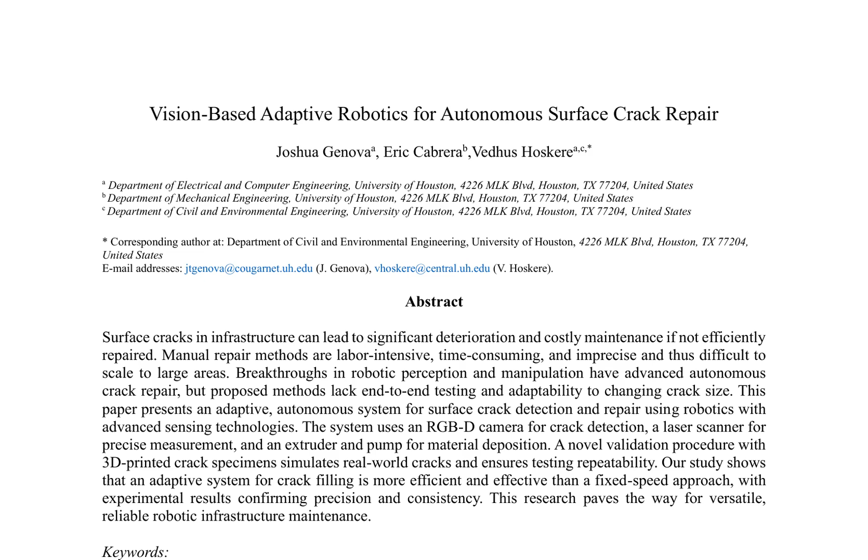for material deposition. A novel validation procedure employing 3D printed crack specimens ensures testing repeatability and simulates real-world cracks. The study demonstrates that an adaptive system for crack filling is more efficient and effective than a fixed-speed approach, with

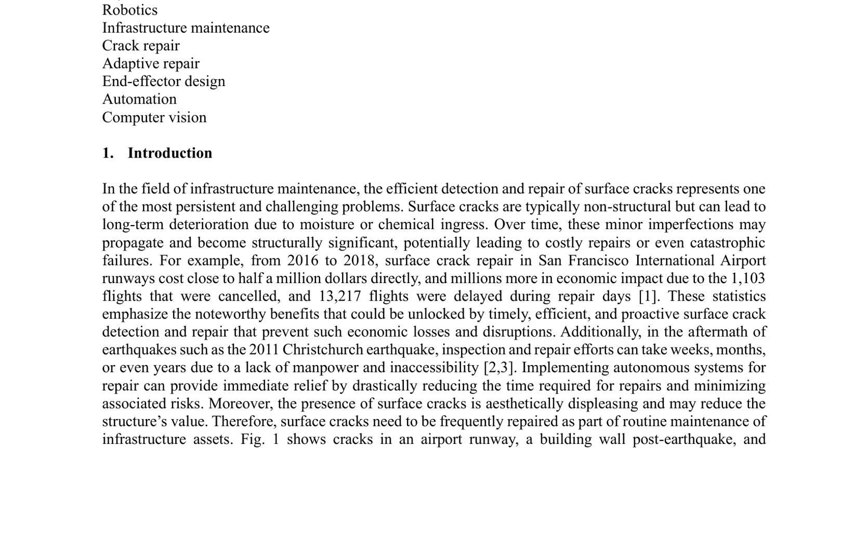experimental results confirming precision and consistency. This research has the potential to revolutionize infrastructure maintenance by providing a versatile, reliable robotic solution.

The research paper explores the challenges and limitations of traditional methods for repairing surface cracks in various environments, such as airport runways, building walls, and doors. These manual processes are time-consuming, prone to human error, and often result in inconsistent repair quality and safety risks.

The integration of adaptive automation and robotics offers a promising approach to enhance accuracy, efficiency, and safety in surface crack repair, improving the longevity and reliability of infrastructure assets and reducing disruptions.

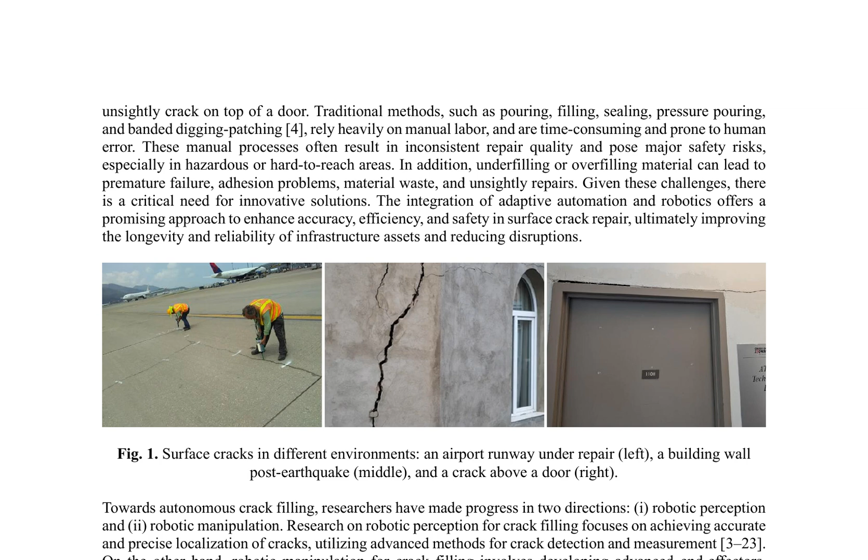In terms of robotic perception for crack filling, significant strides have been made in achieving accurate and precise localization of cracks. Researchers have developed advanced methods for crack detection and measurement using deep learning, unmanned aerial vehicles (UAVs), data acquisition, and visualization for decision-making. These advancements address challenges in data extraction, accuracy, and inspection efficiency.

For robotic manipulation, researchers have focused on developing advanced end effectors, control methods, and path planning to enable precise and efficient application of repair materials to identified cracks.

Several studies have contributed to the development of more effective and autonomous crack repair systems, including semi-autonomous vision-guided systems and robotic manipulators designed for efficient and precise crack filling.

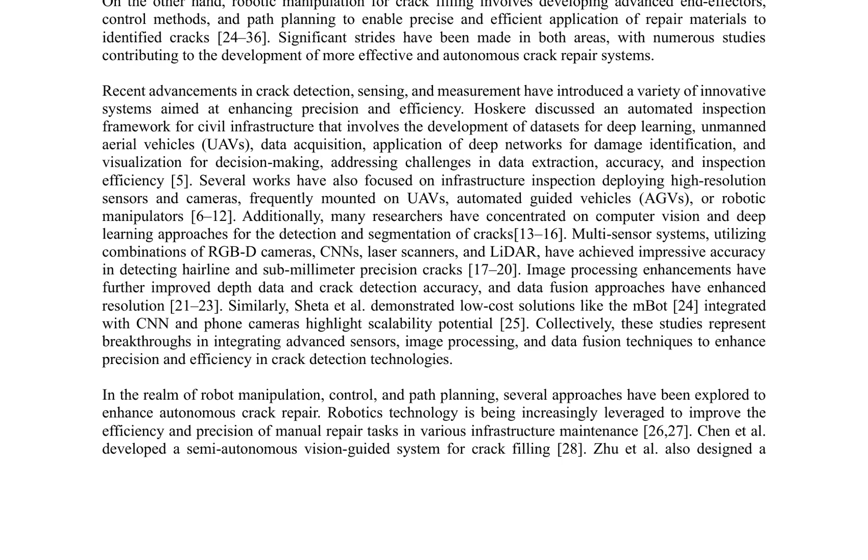Overall, the paper highlights the importance of integrating robotics and automation in crack repair to overcome the limitations of traditional methods. It emphasizes the progress made in both robotic perception and manipulation, showcasing innovative solutions that could revolutionize the field

of surface crack repair. Recent advancements in robotic crack repair have shown promise in adapting to various crack conditions. Notable progress has been made in tracking control accuracy using visual data and path planning for detection robots.

UAV-based systems with soft continuum arms and 3D asphalt printing capabilities have expanded accessibility and on-site repair possibilities. Advanced end effector designs integrating multiple sensors for sealant width monitoring and computational models for predicting sealant flow offer faster

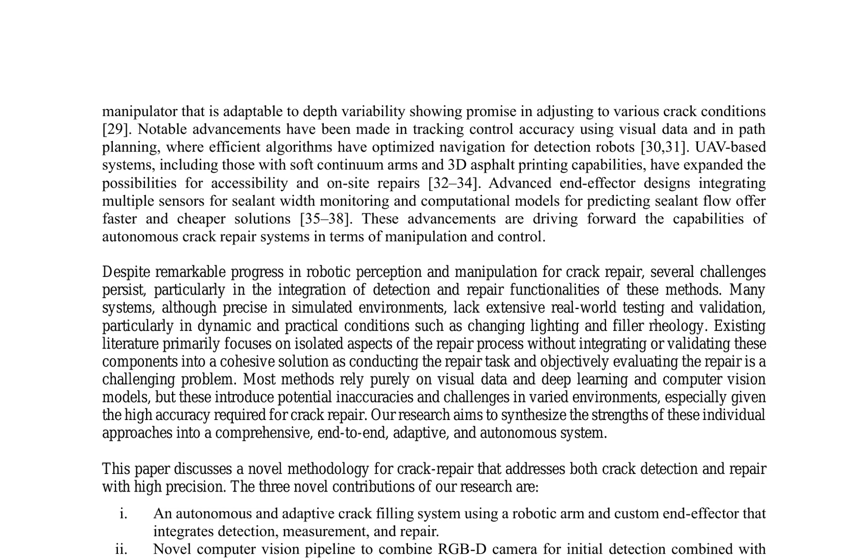and cheaper solutions. Despite these advancements, several challenges persist, particularly in integrating detection and repair functionalities, and most methods rely on visual data and deep learning models, which can introduce inaccuracies in varied environments.

This research aims to synthesize individual approaches into a comprehensive, end-to-end, adaptive, and autonomous system for crack repair. The proposed methodology consists of 4 parts: extrusion calibration, crack coordinates extraction, crack profile measurement, and crack filling.

The calibration process determines extrusion rates by printing material at various speeds and measuring the output. Crack coordinates are extracted using an image segmentation model, and then refined with a laser scanner to enhance precision and

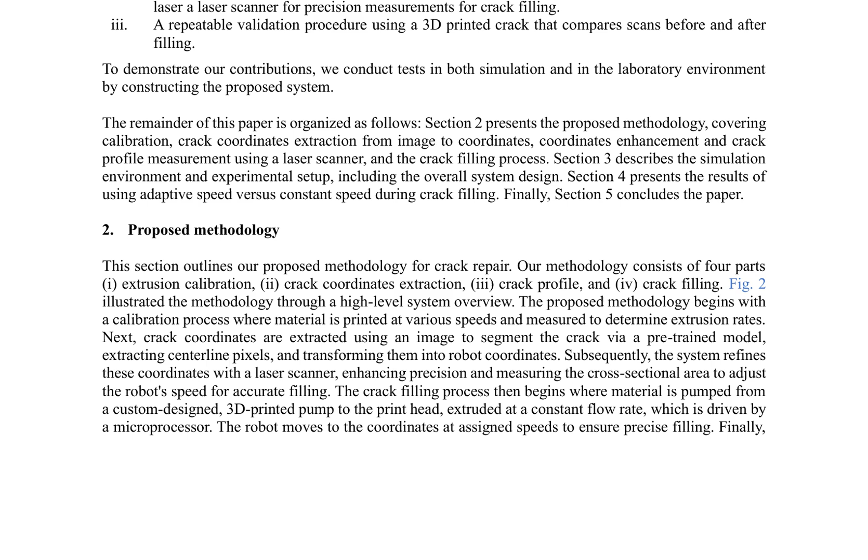measure the cross-sectional area. The crack filling process involves pumping material at a constant flow rate, driven by a microprocessor, and moving the robot to the coordinates at assigned speeds to ensure precise filling.

The proposed validation methodology for crack repair in 3D printing begins with a rescan of post-fill profiles, utilizing heuristic algorithms to detect cross-sectional area. This process is crucial in ensuring that the crack is properly repaired.

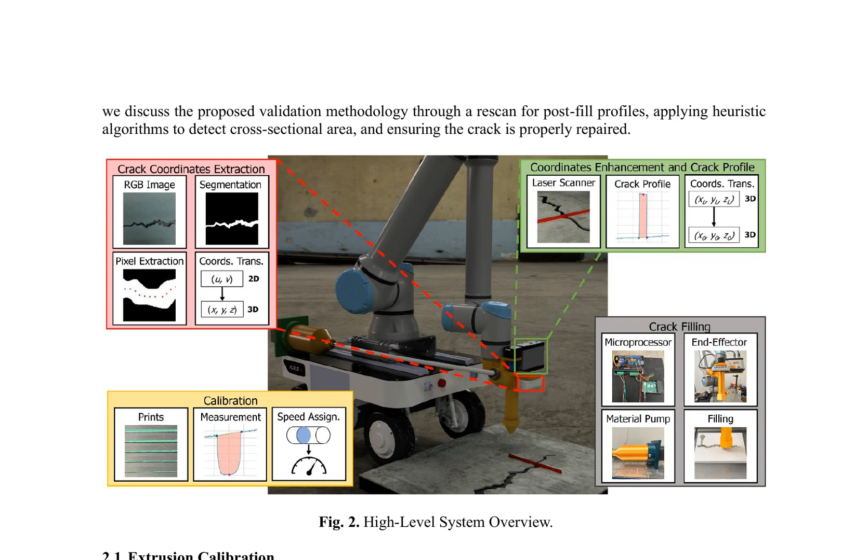Calibration plays a pivotal role in achieving accurate material extrusion during the repair process. It involves printing a strip of material at different speeds and measuring the cross-sectional area using a laser scanner.

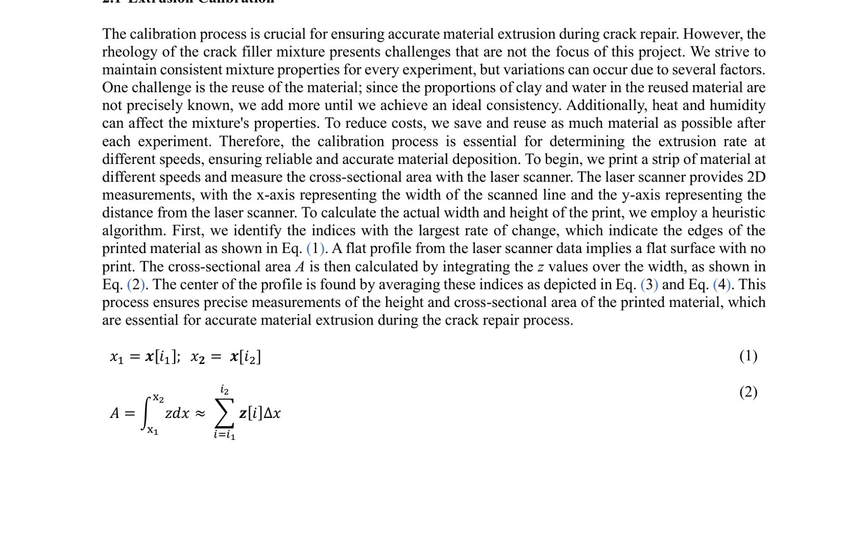The laser scanner provides 2D measurements, which are then processed using heuristic algorithms to calculate the actual width and height of the print. This process ensures precise measurements of the height and cross-sectional area of the printed material, essential for

accurate material extrusion. The authors introduce the concept of calculating the center position of a crack in the X and Y axes, denoted as Cx and Cy, respectively.

This is achieved by averaging the indices I1 and I2, which correspond to the points with the largest sudden change in laser depth Z. The equation for Cx, Cy is given as Cx, Cy equals x_IAVG, z_IAVG, where x_IAVG and z_IAVG are the x and z values from the laser scanner data at the averaged index IAVG.

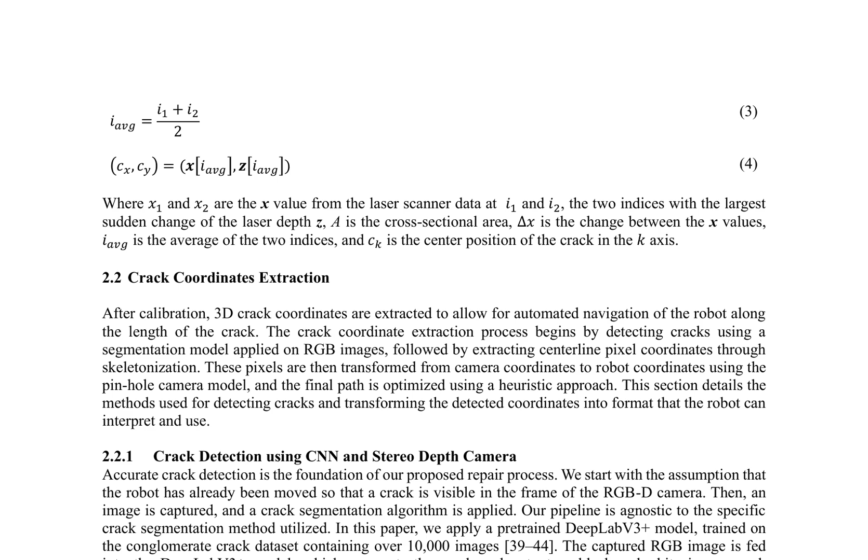The crack coordinate extraction process involves detecting cracks using a segmentation model applied to RGB images, followed by extracting centerline pixel coordinates through skeletonization. These pixels are then transformed from camera coordinates to robot coordinates using the pinhole camera model, and the final path is optimized using a heuristic approach.

The crack detection process is based on the assumption that the robot has already been moved to capture an image of the crack using an RGB-D camera.

The authors utilize a pre-trained DeepLab v3+ model, trained on the conglomerate crack dataset containing over 10,000 images, to segment the crack and output a black and white image mask highlighting the crack.

In the image pixel extraction process, a segmented mask image is converted to grayscale and undergoes binary thresholding to create a clear black and white binary image. Skeletonization is then applied, reducing the crack representation to its thinnest form while preserving the overall structure.

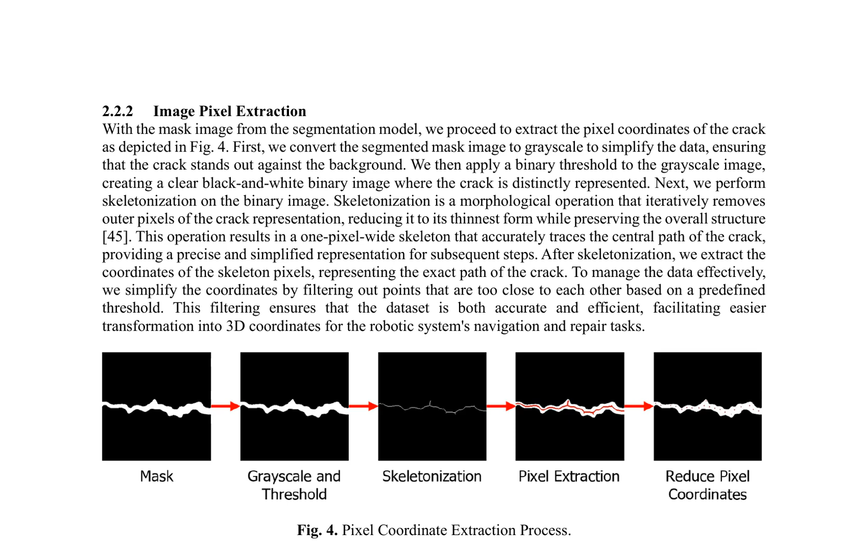The coordinates of the skeleton pixels are extracted, representing the exact path of the crack. To manage the data effectively, points that are too close to each other are filtered out based on a predefined threshold. The pinhole camera model is used to accurately transform the pixel coordinates of detected cracks into 3D camera coordinates.

This model translates the 2D image data captured by the RGB-D camera into a spatial format that the robot can use for precise and effective repair operations.

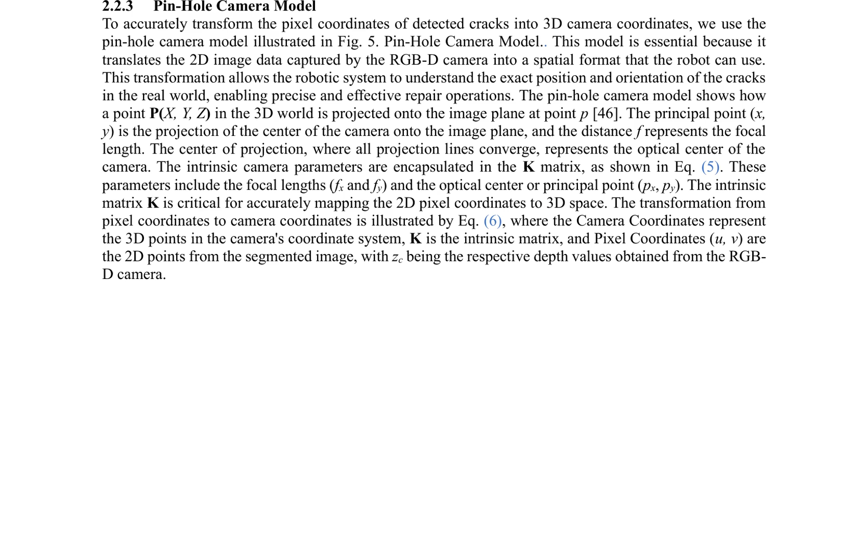The transformation from pixel coordinates to camera coordinates is illustrated by the equation, where the camera coordinates represent the 3D points in the camera's coordinate system, K is the intrinsic matrix, and pixel coordinates U, V are the 2D points from the segmented image, with Zc being the respective depth values obtained from the RGB-D camera.

Accurate transformation from camera coordinates to robot coordinates is vital for the robotic system to interpret and act upon crack spatial positioning. This process involves creating a transformation matrix, T0C, using the camera's extrinsic parameters, including its translation and rotation relative to the robot's base, as defined in equation 7.

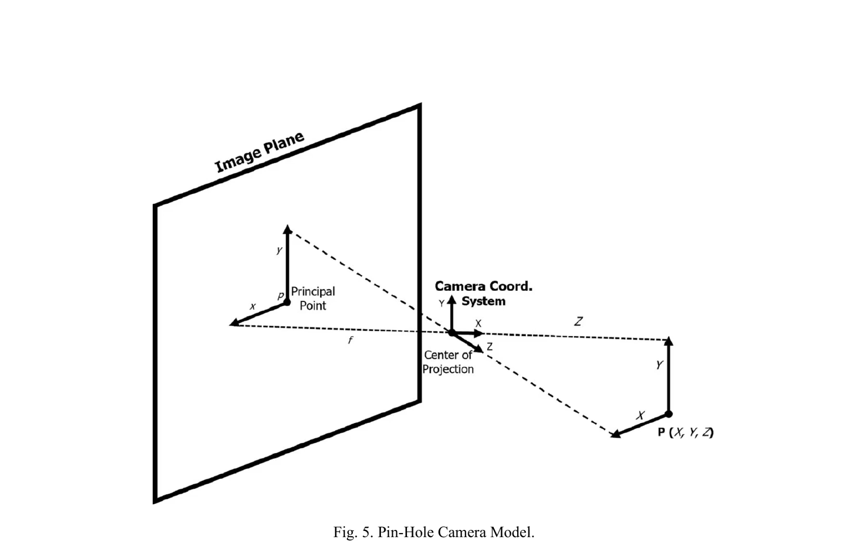The overall process, from pixel coordinates to robot base coordinates, is illustrated in Figure 6. The origin in the image plane, O-image, is where the pixel coordinates of the crack are located.

These coordinates are then transformed to camera coordinates, resulting in a new origin, O-camera. Subsequently, O-camera is transformed into O-robot, the origin of the robot base frame, thereby converting the crack coordinates in the camera coordinate system to the robot base coordinate system.

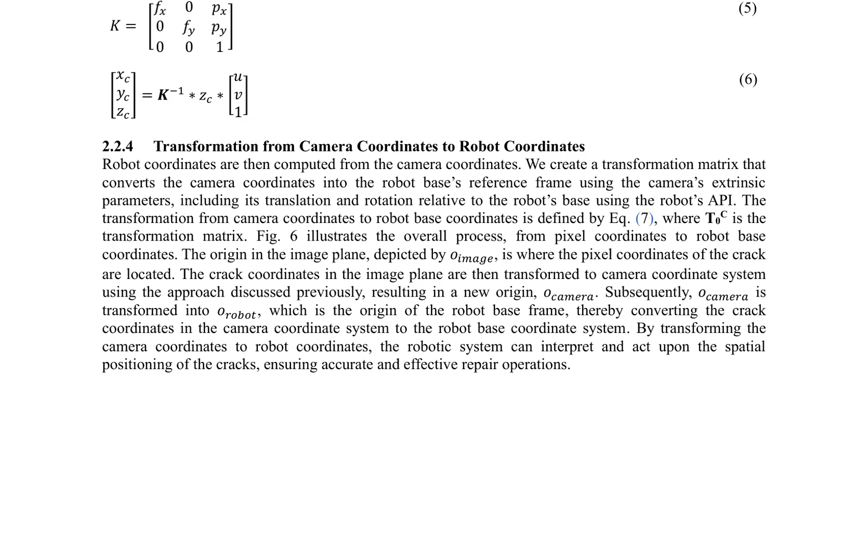This transformation enables the robotic system to accurately and effectively perform repair operations, ensuring precise spatial awareness and effective crack repair. The transformation from 2D image coordinates to 3D robot base coordinates is a pivotal step in the process, as it directly influences the robot's movement and task efficiency.

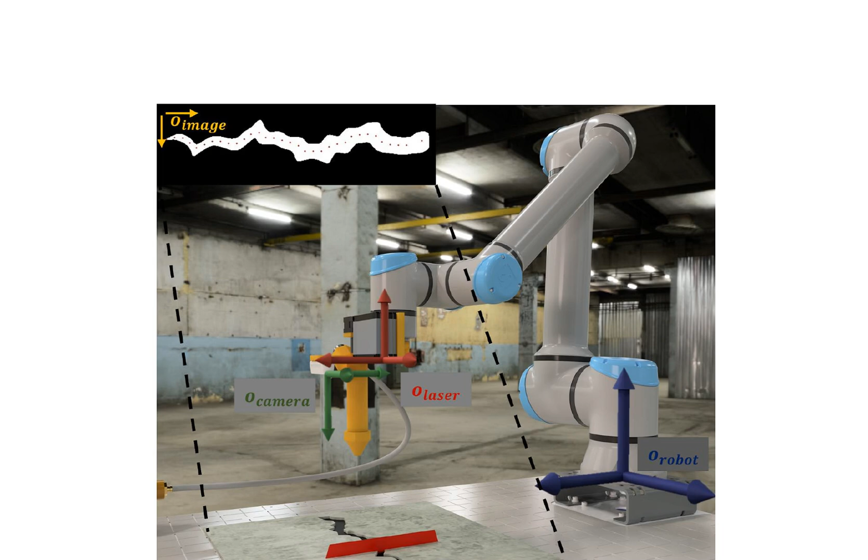This transformation is mathematically represented by equation 7, which calculates the robot's coordinates based on the camera coordinates. Following this transformation, path optimization using a heuristic approach is employed.

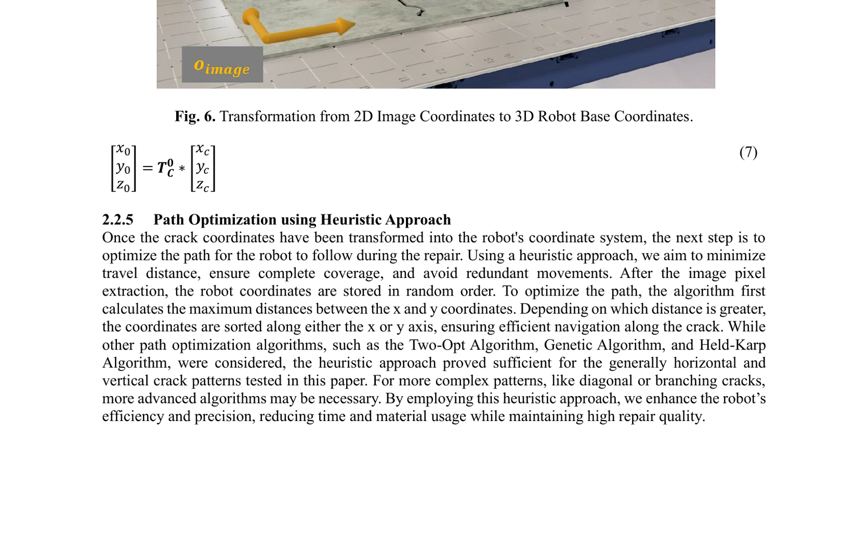This approach involves sorting the robot coordinates in a specific order to minimize travel distance, ensure complete coverage, and avoid redundant movements. The heuristic approach has been found to be sufficient for the tested crack patterns, enhancing the robot's efficiency and precision while reducing time and material usage.

In this section, the authors describe the methods used to enhance the initial image-based crack coordinates and generate accurate crack profiles. Due to the large depth value error of the RGB-D camera, the converted crack coordinates may lack accuracy, making enhanced coordinates essential for precise robot navigation.

To enhance the accuracy of the initially detected crack coordinates, a laser scanner is used to capture high-resolution data along the crack, generating detailed 2D profiles at regular intervals.

The same heuristic algorithm used in the calibration process is employed to generate the profile of the crack, resulting in a cross-sectional profile of the crack necessary for planning material deposition during the repair process.

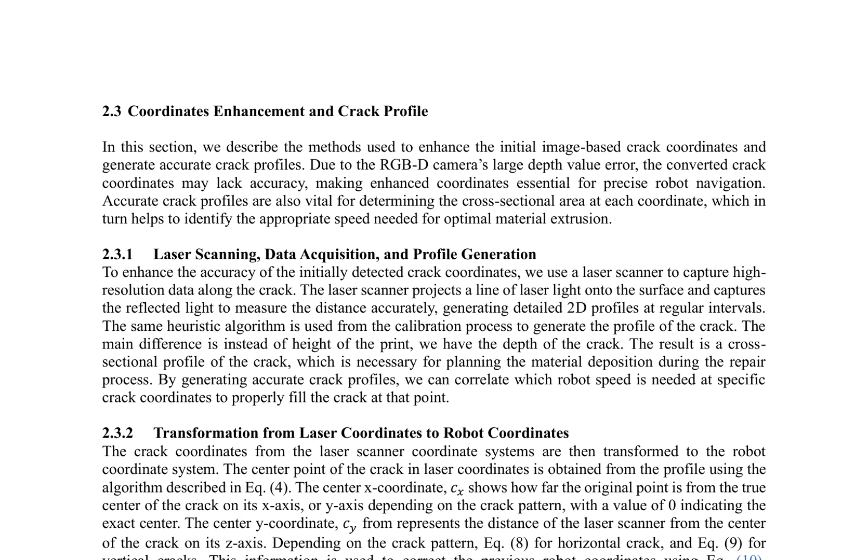The crack coordinates from the laser scanner coordinate system are then transformed to the robot coordinate system. The center point of the crack in laser coordinates is obtained from the profile using the algorithm described in equation 4. The center x coordinate, cx, and center y coordinate, c_y, are calculated using equations 8 and 9, depending on the crack pattern. This information is used to correct the previous robot coordinates using equation 10, transforming them into the robot base's reference frame using a transformation matrix, T_L0.

Figure 6 illustrates the transformation from the laser coordinate system origin to the robot base coordinate system. The transformation matrix, T_L0, is derived from the laser scanner's translation and rotation parameters obtained via the robot's API, and is applied to the center coordinates to transform them into the robot base coordinates.

With the accurate crack coordinates and profile, the robot can begin filling the crack. The filling material is pumped through a custom-designed pump to the end effector, which features a print head that extrudes the filling material. The robot moves to the crack coordinates and begins the filling process, ensuring a consistent flow and minimizing any inconsistency in material output.

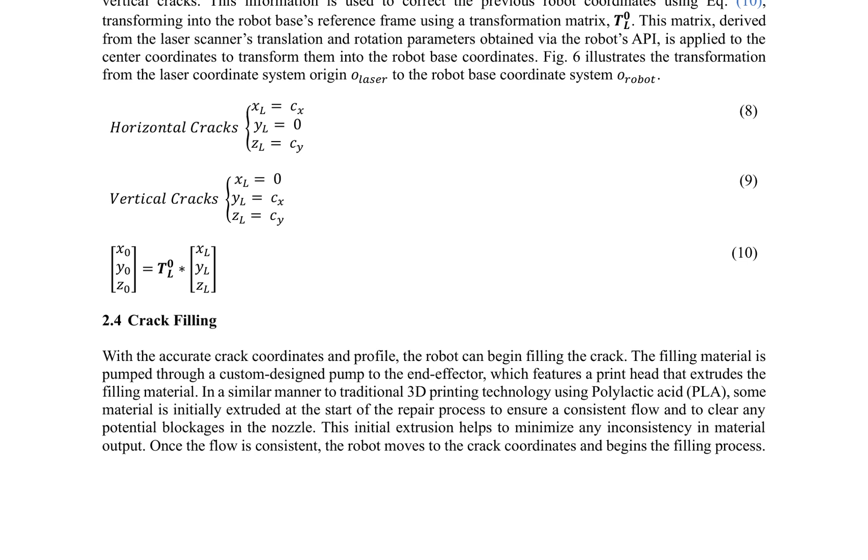The robot navigates the optimized path along the crack, precisely depositing material as it moves. The robot's speed is adjusted based on each crack coordinate's cross-sectional area, ensuring efficient and effective filling.

A post-fill scan is conducted to assess the repair's effectiveness by comparing pre-fill and post-fill profiles. The absolute normalized difference between these profiles quantifies the repair's accuracy, with lower values indicating more accurate and effective repairs.

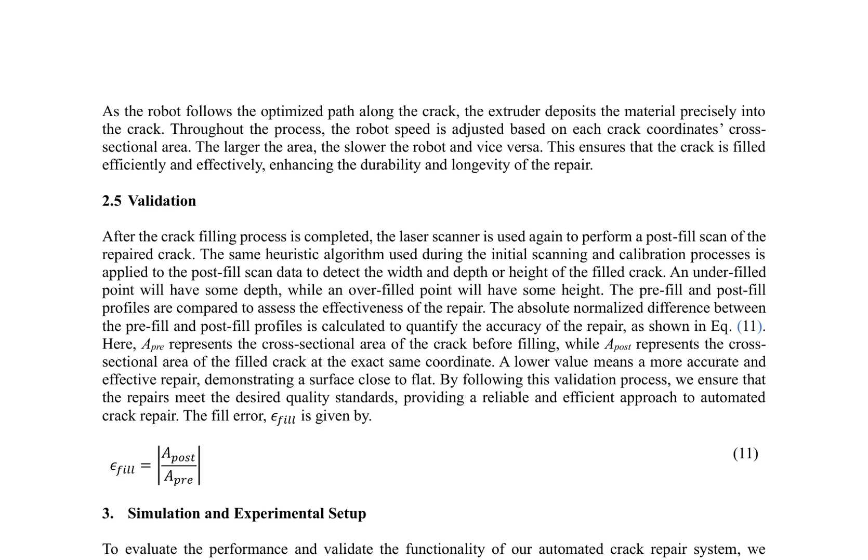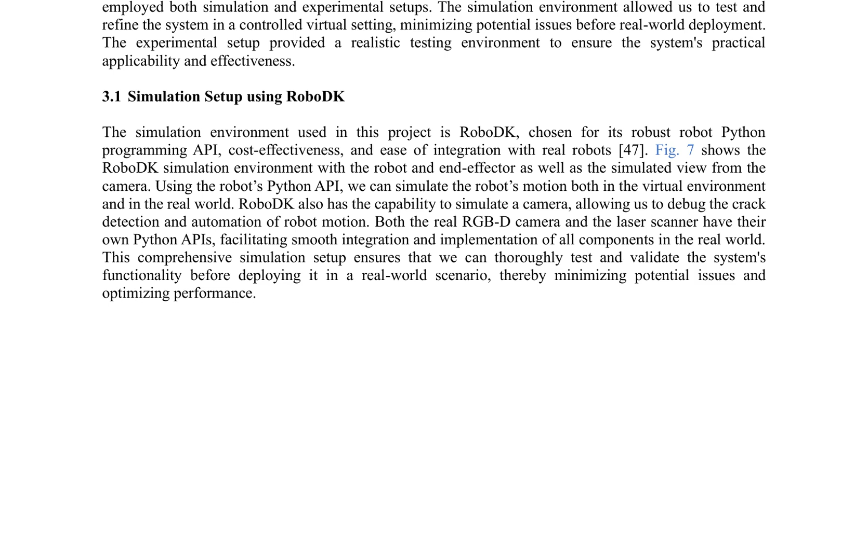To evaluate the system's performance and validate its functionality, both simulation and experimental setups were employed. The RoboDK simulation environment enabled testing and refining the system in a controlled virtual setting before real-world deployment, ensuring practical applicability and effectiveness. The simulation setup includes the robot, end effector, and simulated camera view, allowing for smooth integration and implementation of all components in the real world. This comprehensive simulation setup ensures thorough testing and validation of the system's functionality before deployment, minimizing potential issues and optimizing performance.

The experimental setup for the automated crack repair system involves the physical implementation of its components, integrating the Universal Robots UR10E robotic arm, end effector, pump, microprocessor, and 3D printed crack specimen. The end effector is specifically designed for material extrusion, while the pump is integrated with the overall system to facilitate precise control over the repair process.

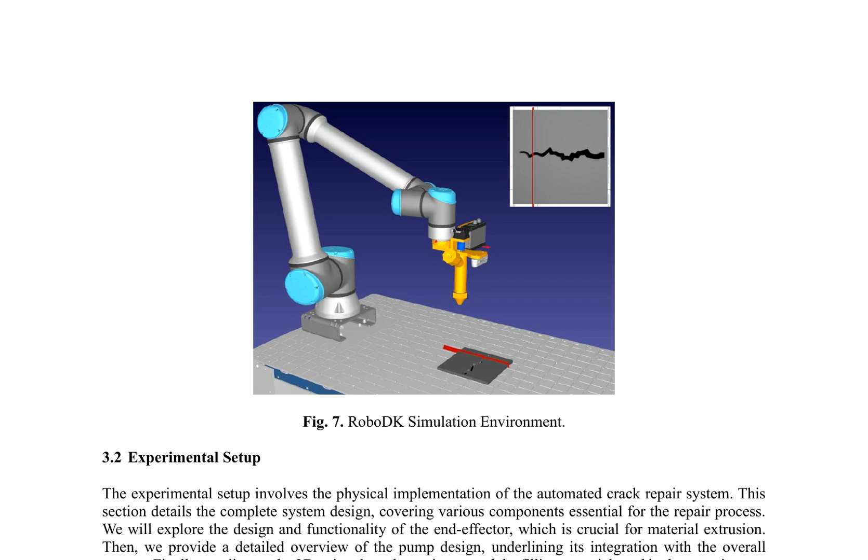The 3D printed crack specimens and filling materials are used for testing and validation, mimicking real-world crack patterns to ensure effective evaluation of the repair process. The system design showcases the interaction between these components, with the robotic arm navigating along the crack to perform the repair with precision and versatility.

The print head, connected to the pump, extrudes the filling material into the crack, controlled by a microprocessor and motor drivers to maintain accurate flow rates. This integrated design enables efficient and accurate crack repair, demonstrating the potential of the automated system in real-world applications.

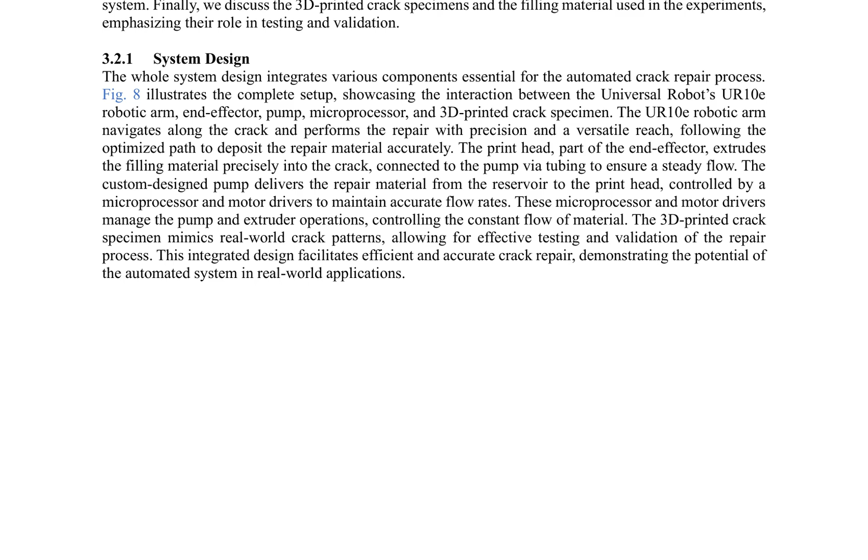The automated crack repair system's design is centered around the custom-designed end effector, a critical component responsible for precise dispensing of repair material into the crack. The end effector integrates an Intel RealSense D435 RGB-D camera, a micro-epsilon scanCONTROL 3002 laser scanner, and a printhead.

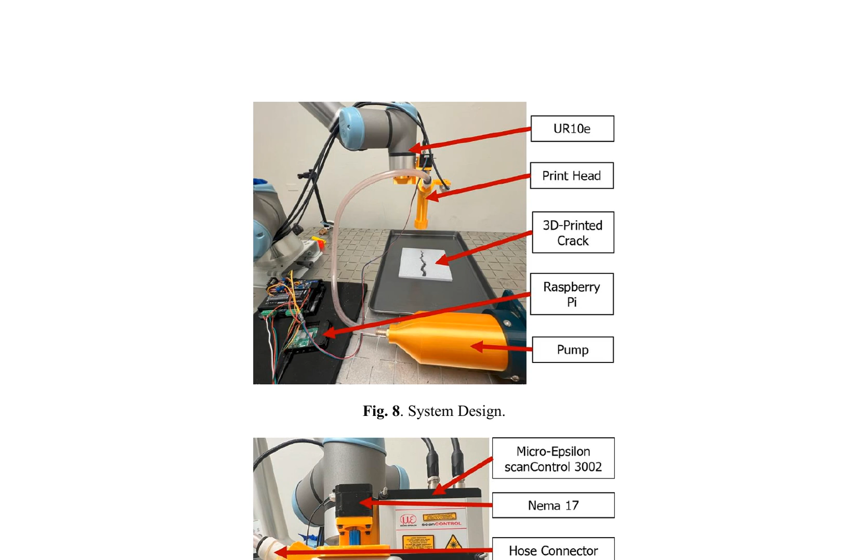The RGB-D camera captures high-resolution images of the crack, providing an RGB image resolution of 1920 by 1080 with a field of view of 69 degrees by 42 degrees and a depth range of 0.3 to 3 meters with an error margin of 2%. The laser scanner enhances the robot's coordinates and creates detailed crack profiles, featuring a measurement range of 200 to 420 mm in the z-axis, a resolution of 1024 points per profile, and a profile frequency of up to 10,000 Hz.

The printhead manages the material flow, delivered through flexible tubing to ensure consistent extrusion. A NEMA 17 stepper motor drives an auger inside the print head, rotating to extrude the material through the 4 mm nozzle. This custom-designed end effector ensures precise material dispensing, accurate crack profiling, and robust robot coordination.

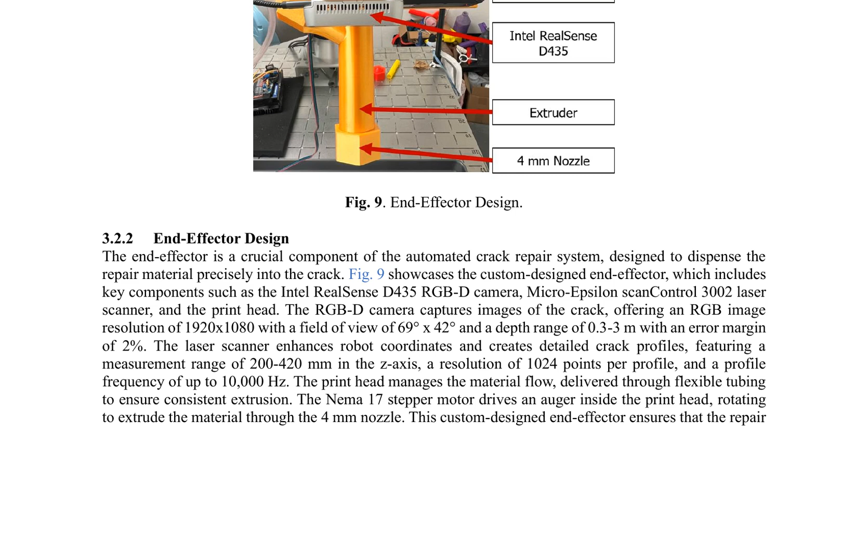The end effector's design considers the requirements for precise material dispensing, accurate crack profiling, and robust robot coordination, enabling the capture of detailed crack information, adjustment of material flow, and high-precision material dispensing.

The pump design for the automated crack repair system is inspired by a medical syringe, featuring a cylinder to cone shape with a plunger mechanism.

This structure efficiently delivers material to the print head, influenced by the diameter of the barbed hose and the viscosity of the material. The design underwent modifications to enhance structural integrity, minimize leakage, and improve versatility.

For testing purposes, 3D printed crack specimens were created to mimic real-world cracks with varying widths, depths, and orientations. The filling material used is a mixture of play dough and water, which is easy to test and reusable.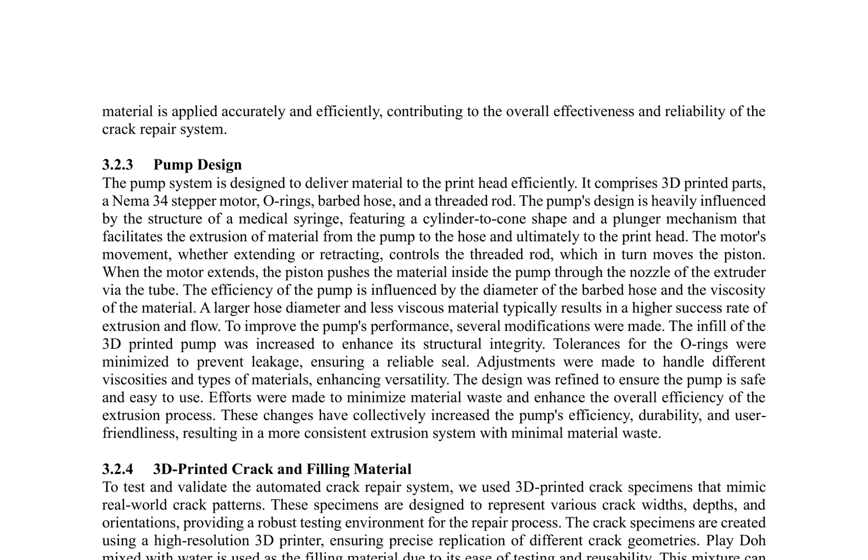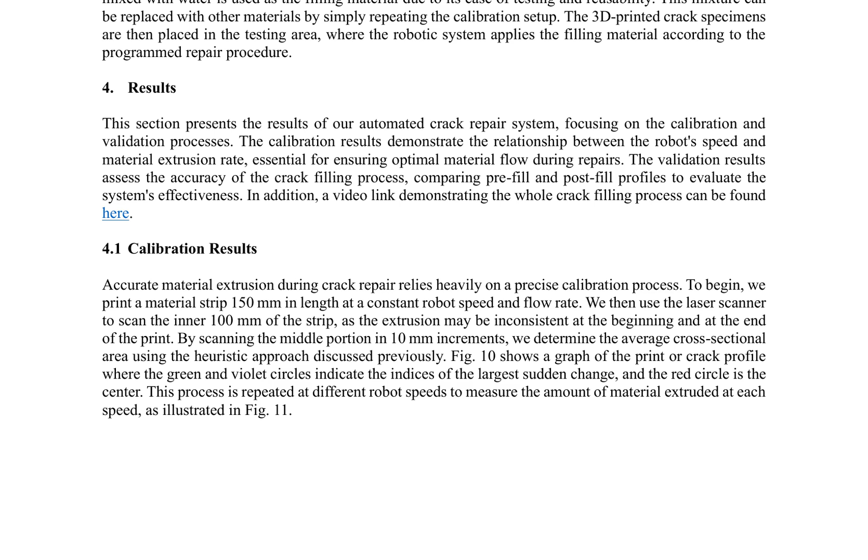The results section delves into the calibration and validation processes. Calibration involves scanning a material strip to determine the average cross-sectional area at different robot speeds. This process helps in understanding the relationship between robot speed and material extrusion rate, ensuring accurate filling of cracks. The validation process focuses on the accuracy of the crack filling process, providing insights into the system's performance and potential areas for improvement. This summary provides a concise overview of the pump design, testing materials, and calibration process for the automated crack repair system, offering researchers and stakeholders a clear understanding of the technical aspects involved.

The calibration process involved establishing the relationship between the robot's speed and the amount of material extruded. This was achieved by testing various speeds and measuring the cross-sectional areas of the extruded material. The results, as summarized in Table 1, demonstrate an inverse relationship between the robot's speed and the material extrusion rate. As the robot's speed increases, the amount of material extruded decreases, and vice versa. This calibration is crucial for the crack filling process, where each crack coordinate with varying sizes requires an appropriate speed for optimal material extrusion.

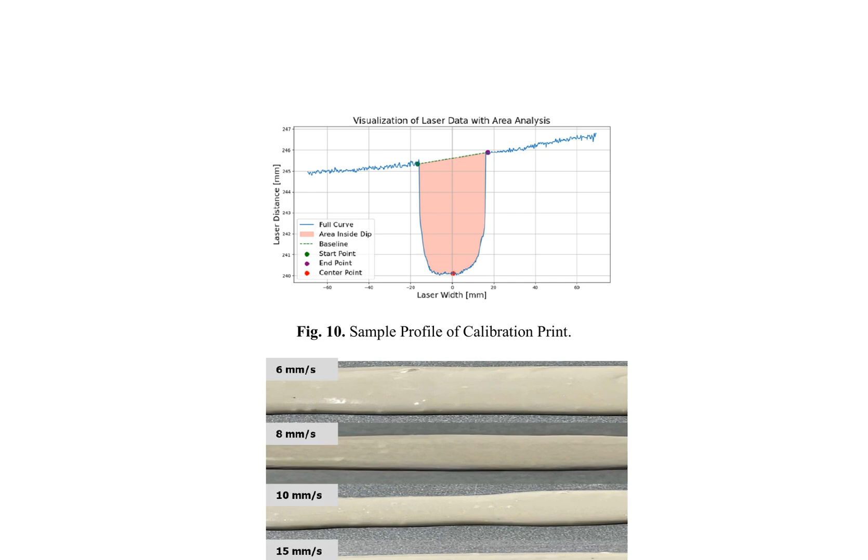Figure 10 presents a sample profile of a calibration print, providing visual evidence of the extrusion process. Meanwhile, Figure 11 illustrates the material extrusion at different robot speeds, further emphasizing the inverse relationship observed in Table 1. The data in Table 1 indicates that as the robot's speed increases from 6 mm per second to 20 mm per second, the cross-sectional area of the extruded material decreases from 165.764 mm to 41.713 mm, respectively. The standard deviation also varies, but it generally decreases as the speed increases, suggesting more consistent extrusion at higher speeds.

This calibration process is essential for optimizing the crack filling process, ensuring that the appropriate amount of material is extruded at each crack coordinate. By associating specific speeds with their corresponding cross-sectional areas, the system can be programmed to adjust its speed according to the size of the crack it encounters, enhancing the efficiency and effectiveness of the repair process.

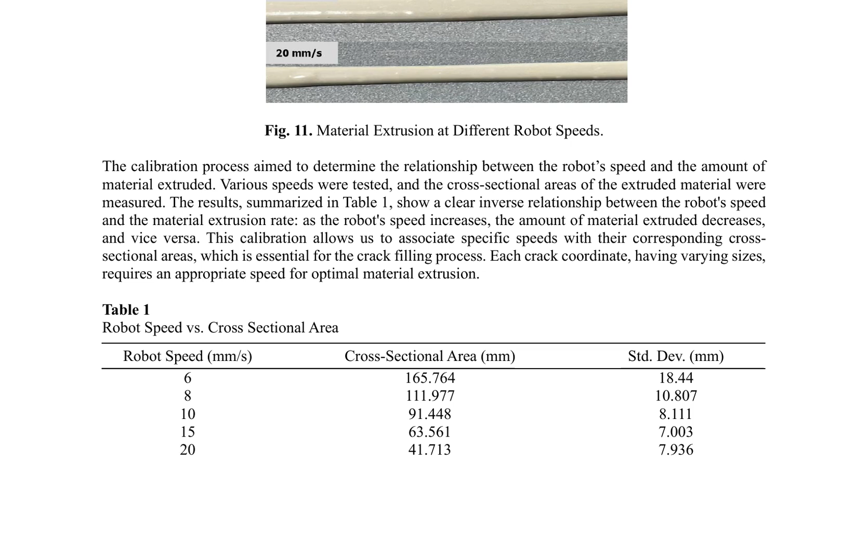Crack filling efficiency evaluation. The crack filling efficiency of a novel robotic system is evaluated through a comprehensive methodology. Adaptive speed control is employed to optimize the filling process, ensuring the lowest error and highest accuracy. This approach allows for real-time adjustments to the robotic arm's speed, adapting to varying crack geometries and complexities.

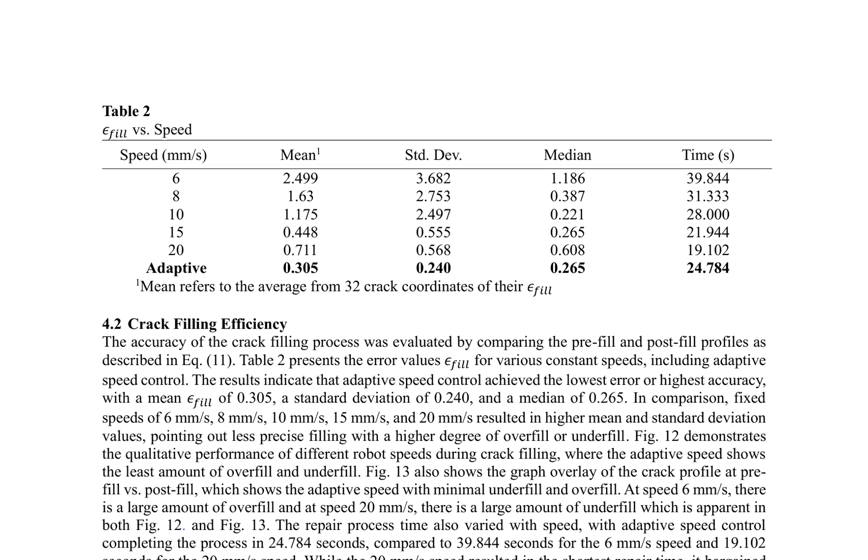These findings underscore the importance of adaptive speed control in achieving precise and efficient crack filling. The ability to adapt to changing crack geometries enables the robotic system to navigate complex cracks with increased accuracy, resulting in improved repair outcomes.

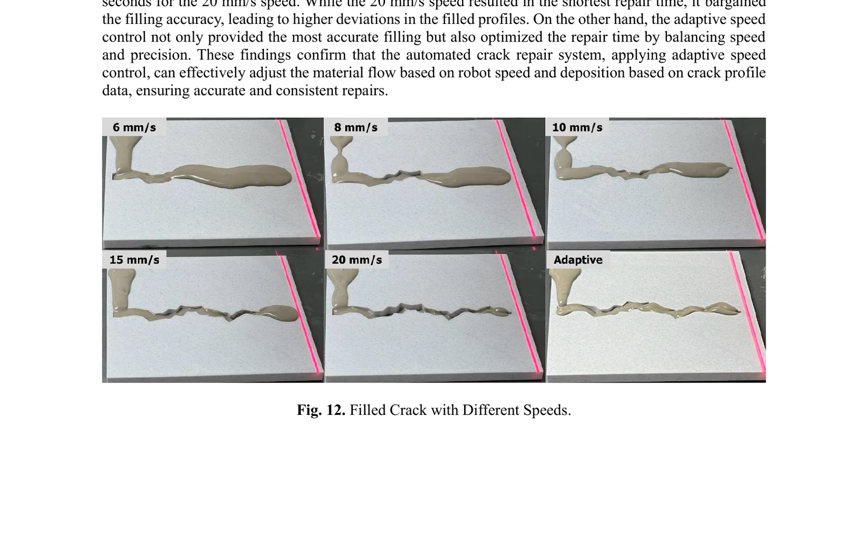The novel design for an adaptive, autonomous system for surface crack detection and repair integrates an RGB-D camera for initial crack detection, a laser scanner for precise measurement and profile generation, and an extruder for material deposition. The system first calibrates the relationship between the robot's speed and material extrusion rate for adaptive repair. It utilizes precise crack perception to ensure optimal material flow for varying crack sizes.

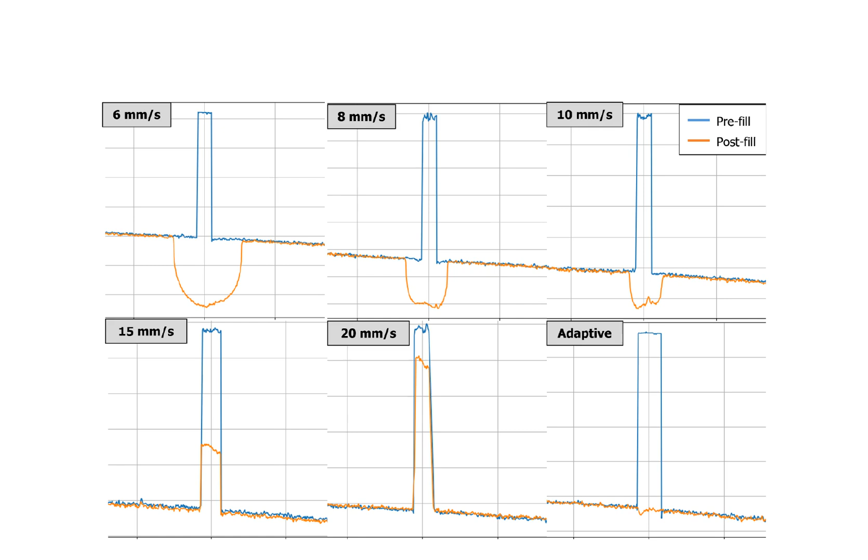A 3D printed crack was used for validation, demonstrating the benefits of an adaptive system for efficient and effective filling. Experimental results confirmed the system's capability to perform crack repairs effectively, balancing repair time and filling precision. The post-fill validation process, involving laser scanning and fill error calculation, highlighted the system's effectiveness in achieving accurate repairs.

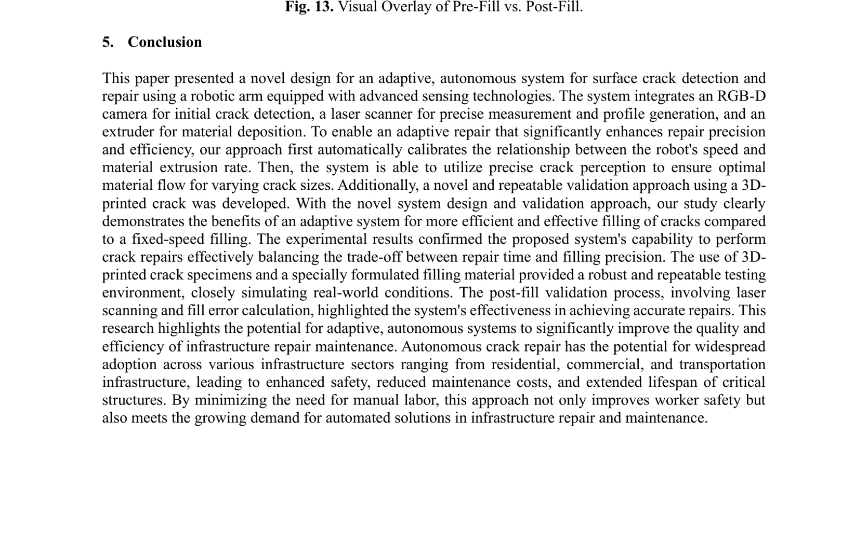This research highlights the potential for adaptive, autonomous systems to significantly improve the quality and efficiency of infrastructure repair maintenance, enhancing safety, reducing maintenance costs, and extending the lifespan of critical structures.

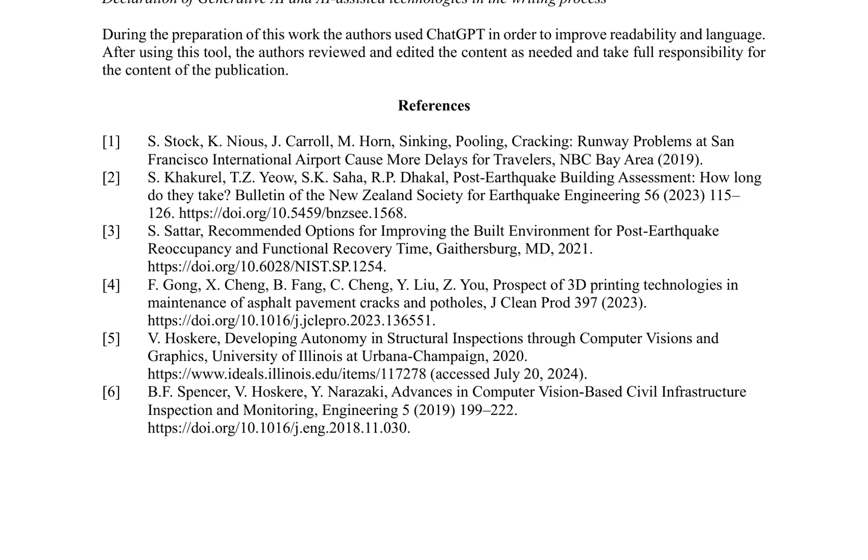The authors present a comprehensive review of existing research in the field of autonomous robotic systems for structural health monitoring, particularly focusing on crack detection and 3D reconstruction. They provide an extensive list of 22 robotic systems that have been developed to inspect and assess the condition of various structures such as bridges, buildings, and tunnels.

The paper highlights the importance of crack detection as a critical aspect of structural health monitoring, as even small cracks can lead to significant damage if left undetected. It discusses various sensing technologies used for crack detection, including ultrasonic sensors, infrared thermography, and image processing techniques. These technologies are integrated into robotic systems to enable autonomous inspection and assessment of structures.

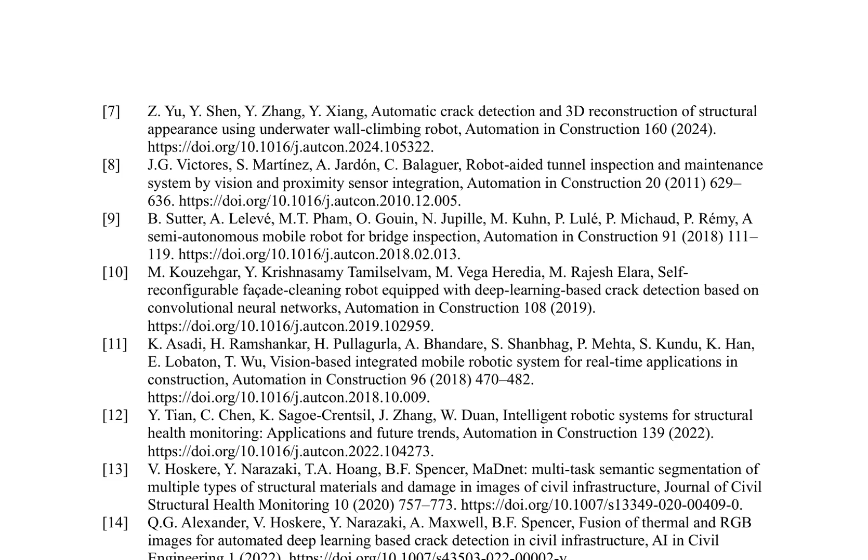In addition to crack detection, the authors also emphasize the role of 3D reconstruction in structural health monitoring. This involves creating detailed models of structures using data collected from sensors and cameras mounted on robots. The paper discusses different methods for 3D reconstruction, including photogrammetry, laser scanning, and structured light scanning. These methods allow for accurate visualization and analysis of structures, enabling researchers to identify potential issues and plan maintenance or repairs accordingly.

The authors also address the challenges associated with deploying these systems in real-world environments. For instance, they discuss the need for robust navigation algorithms that can guide robots through complex structures, as well as the importance of ensuring the reliability and accuracy of sensor data. Furthermore, they highlight the need for efficient data processing and analysis techniques to handle the large amounts of data generated by these systems.

Overall, the paper provides a thorough overview of the current state of the art in autonomous robotic systems for structural health monitoring, highlighting both the advancements and the challenges in this field. It serves as a valuable resource for researchers and practitioners working on developing and deploying these systems in various applications.

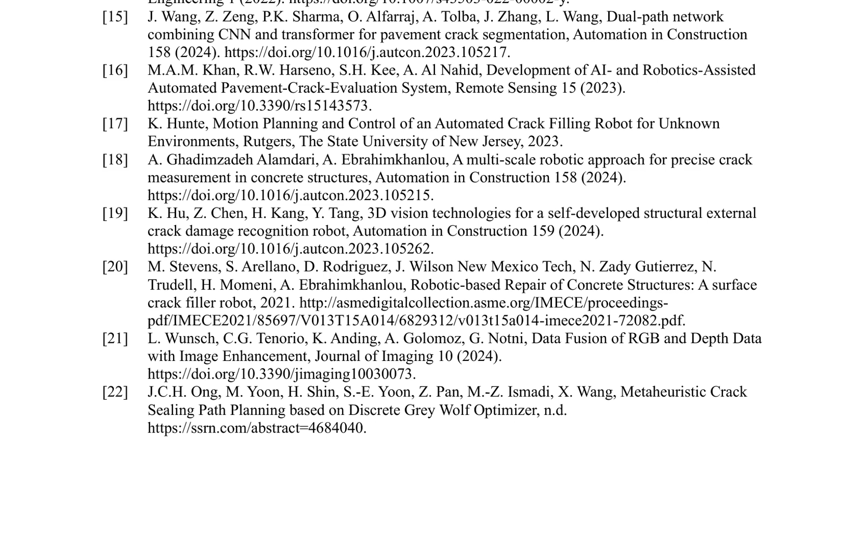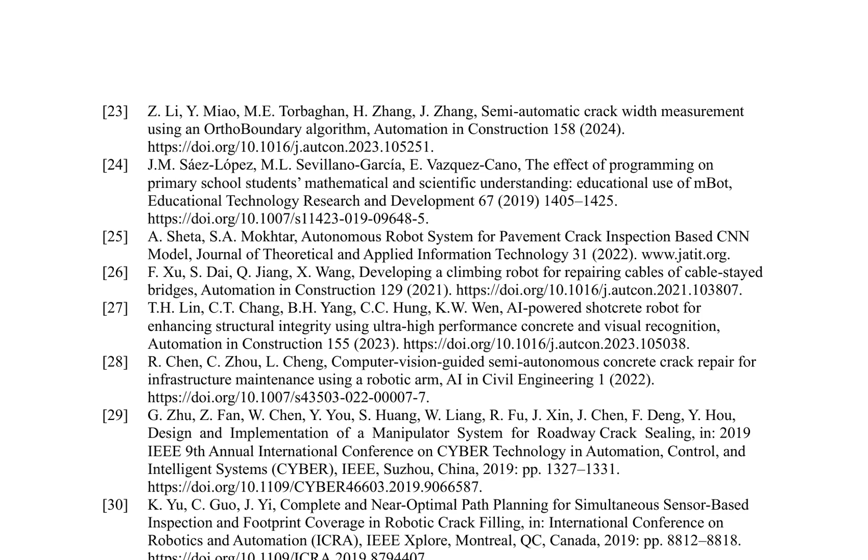The application of robotics and artificial intelligence in infrastructure maintenance is a rapidly evolving field, particularly in crack detection and repair. Autonomous robots are being developed for crack inspection and repair, utilizing computer vision and machine learning algorithms. Integration with advanced sensors enables real-time monitoring and response.

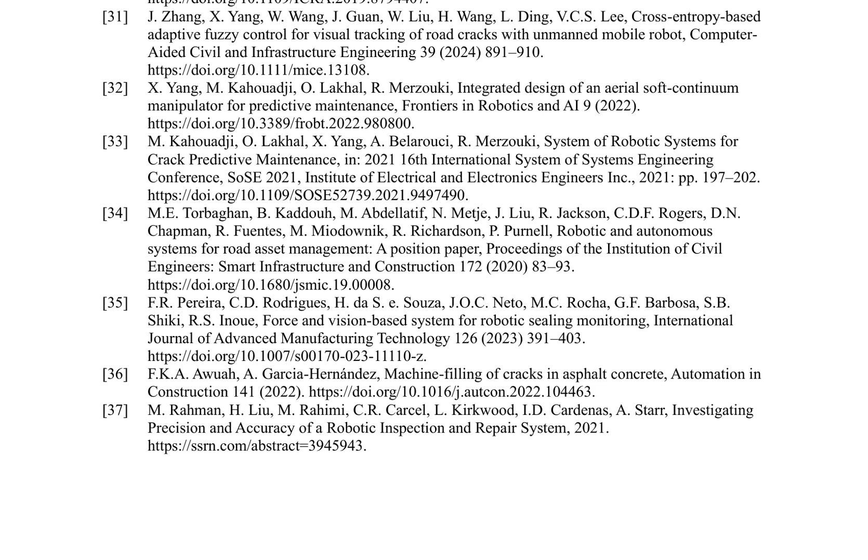The technical aspects of these studies involve key methodologies and findings that emphasize the significance of these innovations in enhancing infrastructure durability and reducing maintenance costs. Researchers have made significant strides in pavement crack detection and robotic injection sealing, a critical aspect of road maintenance.

One study focused on position-based fluid simulation, highlighting the importance of precise fluid dynamics for effective robotic injection sealing of pavement cracks.

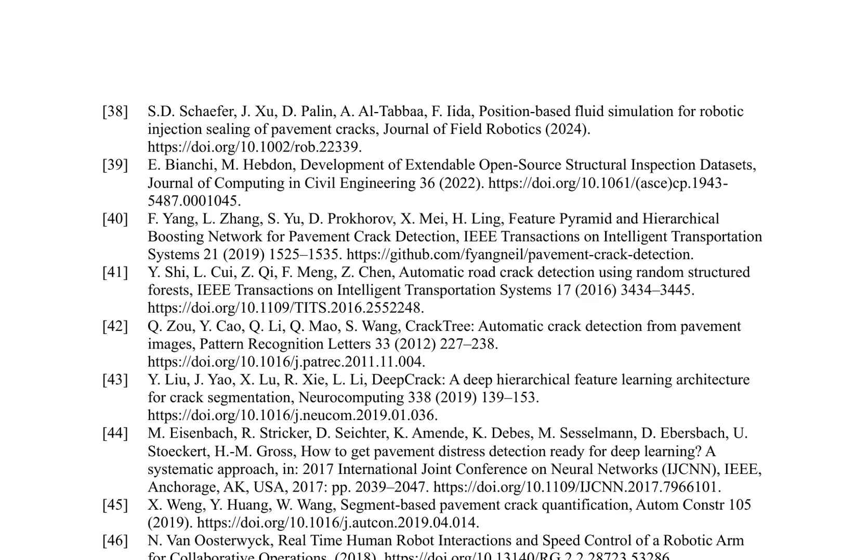To improve crack detection, researchers developed open-source structural inspection datasets, which can be leveraged by feature pyramid networks to detect cracks. Another approach utilized random forests for automatic road crack detection. The CrackTree algorithm was also employed to detect cracks from pavement images, while deep hierarchical feature learning enabled accurate crack segmentation. A systematic approach was proposed to prepare pavement distress detection for deep learning, ensuring the development of reliable models. Segment-based pavement crack quantification further enhanced the accuracy of crack detection.

Beyond detection, researchers explored real-time human-robot interactions for collaborative operations, paving the way for efficient road maintenance. RoboDK, a software for robotic simulation and programming, was also utilized in this context. These advancements collectively contribute to the development of efficient and effective pavement crack detection and robotic injection sealing systems.